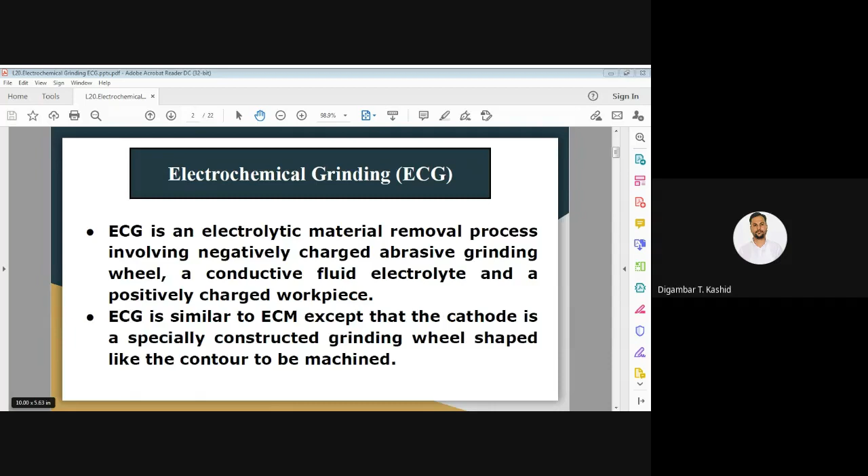So the basic question is: what is a conventional grinding wheel? In a conventional grinding wheel, abrasive particles are bonded together with a bonding material like a resin bond. The workpiece may be electrically conducting or non-conducting material, so any kind of material can be polished by a normal conventional grinding wheel.

A grinding wheel has abrasive particles bonded together using a bonding material like a resin bond. You can grind any workpiece material, electrically conductive or non-conductive. So any kind of metal can be ground or polished by this conventional operation.

Conventional grinding gives good surface finish and low tolerance value, but it produces burr at the edges. There is also a heat affected zone and thermal residual stresses, because shearing occurs by abrasive particles on the workpiece metal. Deformation takes place during shearing, so burrs are formed.

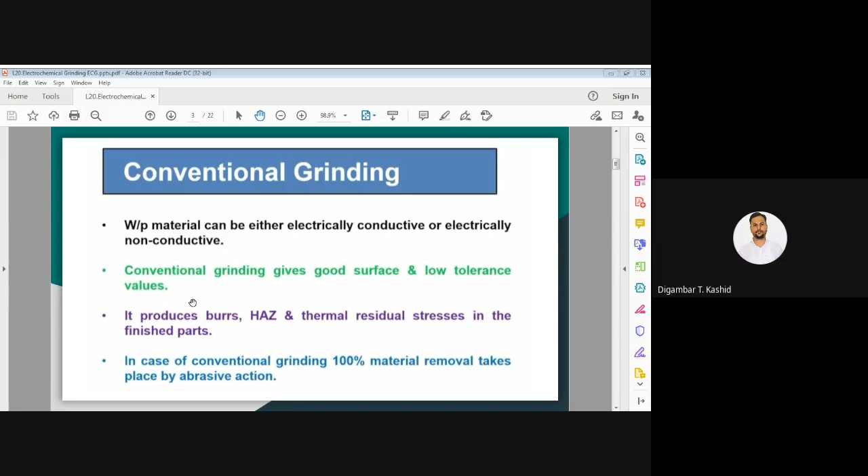The HAZ, the heat affected zone, is also there. These are some disadvantages of conventional grinding, and another is thermal residual stress generated on the workpiece surface. In conventional grinding, 100% material removal takes place by abrasive action through shearing by abrasive particles, so abrasive action is important in conventional machining.

But now you can look at this slide. In case of this electrochemical grinding operation, 90% of material is removed by the electrochemical machining operation, and the remaining 10% of material removal is taking place by grinding operation, okay. 90% by electrochemical machining operation, and 10% by grinding operation.

In this slide you can see two pictures I have shown. First is related to the normal conventional grinding operation, and second one is the electrochemical grinding operation. In the first case you will see the grinding here. This is the contact arc length. In that contact arc length, the abrasive particles of the grinding wheel are totally in contact with your workpiece metal, okay, in conventional grinding machining.

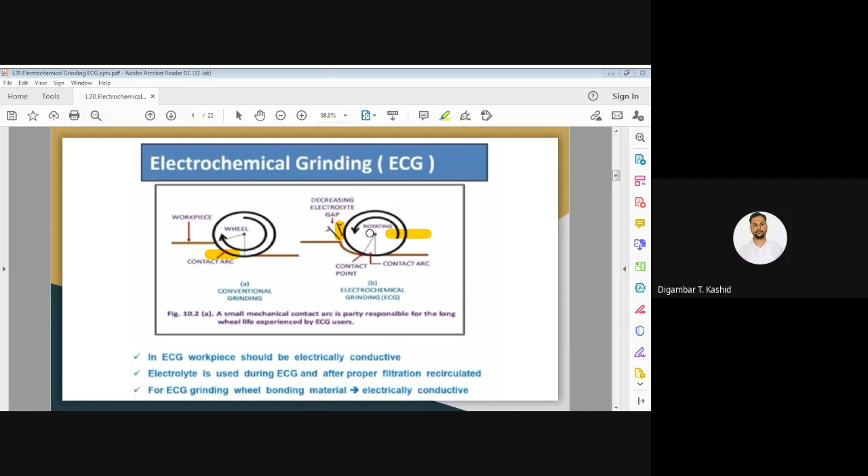And in this electrochemical grinding operation, your grinding wheel acts as a cathode. Okay, so in an electrochemical grinding machine, the grinding wheel will act as a cathode, and your workpiece will act as an anode. Okay, so material removal takes place by electrochemical dissolution, by electrochemical machining, and its value is 90%. Material removal takes place by electrochemical or electrolytic dissolution. So that is 90%, and the remaining 10% material removal takes place by mechanical abrasion, that means your grinding, and that is 10%.

Okay, so the material removed by mechanical abrasion or mechanical shear is 10%. So you can see here 90% material is removed by electrochemical machining, that means electrochemical dissolution, and the remaining 10% material is removed by mechanical abrasion. Okay, so using this electrochemical grinding process you can achieve a higher material removal rate. Okay.

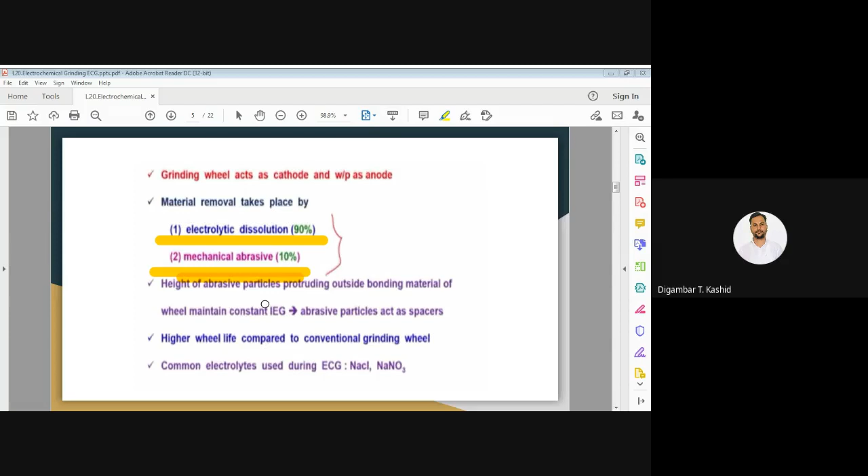So here in the electrochemical grinding operation we use abrasive particles. Okay, in this operation, these abrasive particles are protruding from your grinding wheel. You can see the grinding wheel, and on that grinding wheel we have the abrasive particles. So these abrasive particles are protruding from your grinding wheel. Okay, and it will act as a barrier. It will maintain the inter-electrode gap, and it acts as a barrier between your grinding wheel and your workpiece.

Okay, and these abrasive particles do not allow your grinding wheel material to touch your workpiece surface, because these abrasive particles protruding from your grinding wheel act as a barrier. Okay, so they do not allow your metallic bonding material to touch your workpiece surface. Okay, so that way you maintain your proper inter-electrode gap.

Okay, so you can see the height of the abrasive particles protruding outside the bonding material of the wheel maintains a constant inter-electrode gap. So the abrasive particle acts as a spacer. Okay, and in that inter-electrode gap we have to supply the electrolyte. Okay, you can see. And the machining or grinding operation actually occurs in three phases or three stages. Okay.

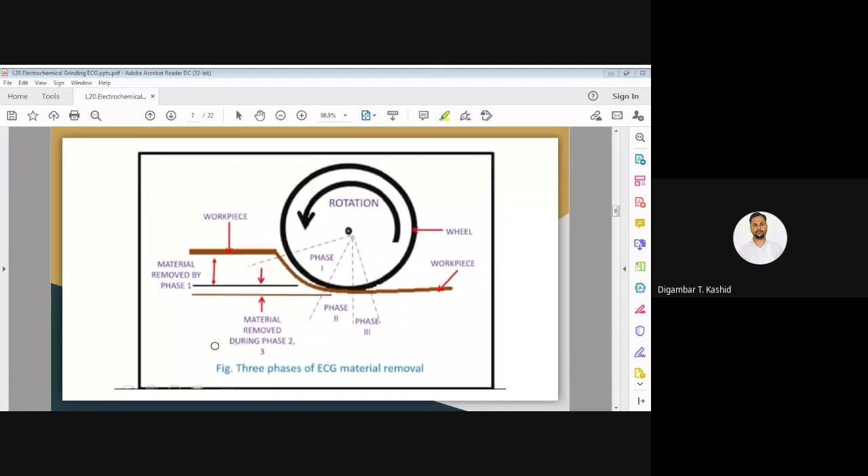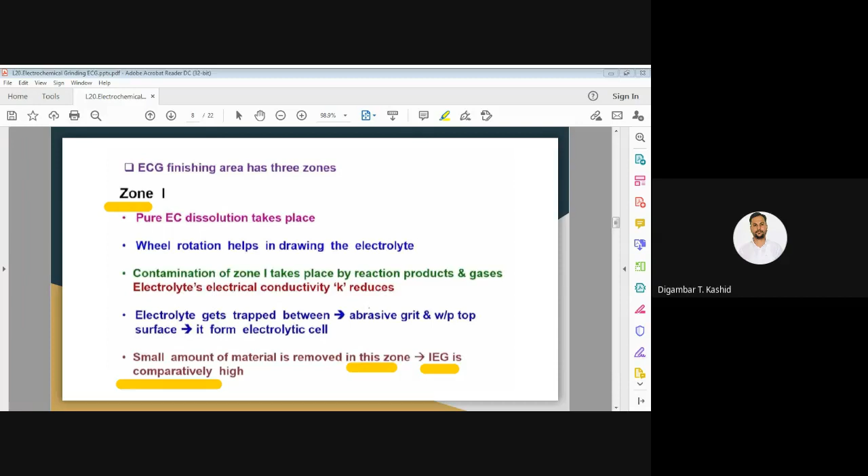So a small amount of metal is removed in this zone, and the interelectrode gap is high compared to the other zones. The electrolyte gets trapped between the abrasive grit and the workpiece top surface, and due to that it forms an electrolytic cell. Once again I'm repeating, the electrolyte gets trapped in between these two abrasive particles and the workpiece top surface. That's about zone number one.

Then zone number two. In zone number two, pressure is high, because the grinding wheel is rotating at a very high rpm, with a peripheral velocity of maybe 1200 to 1800 meters per minute. Because of that, a huge amount of pressure is generated in zone number 2. There is also a converging gap in zone number 2, so the abrasive grain and the workpiece come very close to each other.

In zone number 2, the abrasive grains abrade the workpiece surface, and as a result they remove material from the workpiece and the oxide layer, if any. Here the metal removed will be in the form of chips. And removing the oxide layer helps the electrochemical dissolution. So sometimes we need mechanical assistance in the electrochemical grinding process.

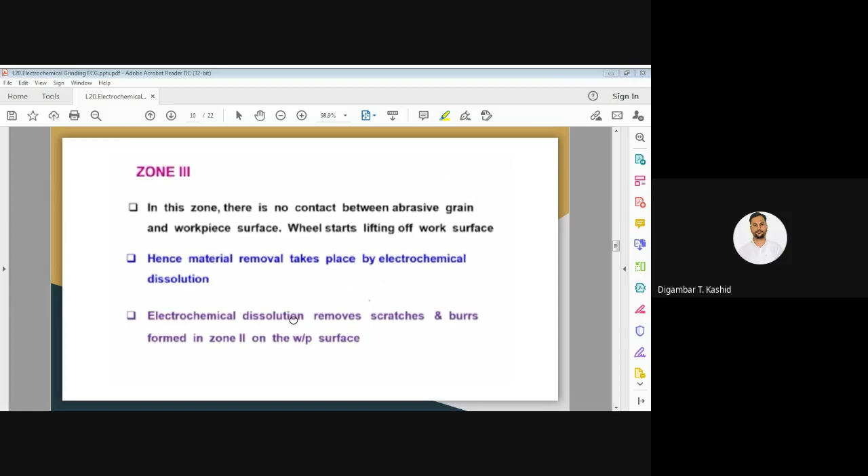In zone number 3, there is no contact between the abrasive grain and the workpiece surface, as the wheel starts lifting from the work surface. Hence material removal takes place only by electrochemical dissolution. This electrochemical dissolution removes the scratches and burrs formed in zone number 2 on the workpiece surface. So these are the three different zones which occur during electrochemical grinding.

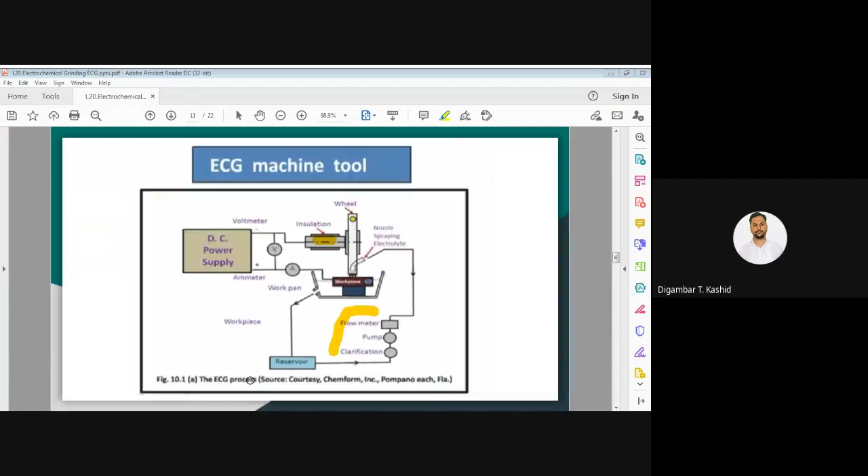Because the carbide tip of the cutting tool needs to be ground, for that purpose you can use this operation. The carbide tip will act as the workpiece. Between the carbide tip and the grinding wheel there are insulating abrasive particles, and that gap we have to maintain. Sodium nitrate you can use as the electrolyte for this case.

Draw the diagram, I will just explain. The total machining area is made of non-corrosive material because electrolyte is there. So the machining area is normally made of non-corrosive and electrically non-conductive material. And power supply we have to provide to the grinding wheel.